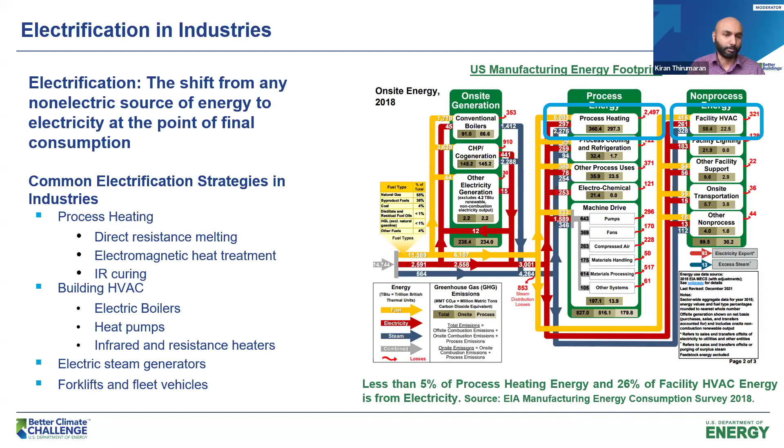So this speaks to the potential for electrification in the manufacturing sector. And similarly, even if you look at the facility HVAC, shown on the right end of your screen, we have around much less energy use, around 1,000 trillion BTUs, and a significant portion of that is still fuel fired. So both in the process heating space and in the building HVAC side, heating, ventilation, and air conditioning, there is scope for electrification within the manufacturing sector in the US. This is what we are going to be looking at. Our speakers are going to be talking a bit more about these things. Where are they finding opportunities on the HVAC side? Where are they finding opportunities on the process heating side to electrify these processes?

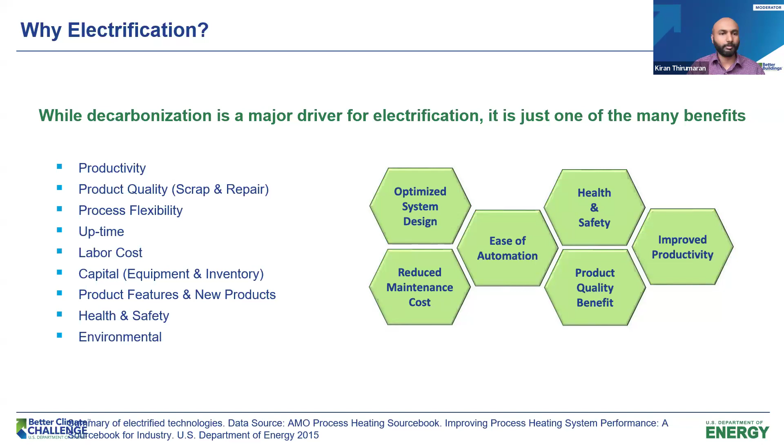Decarbonization is one of the big drivers for electrification, but it is not the only reason we would electrify our processes. There are productivity benefits that come with electrification, product quality benefits, and also benefits associated with operating cost as well. These are things we'll be hearing more about from our speakers today.

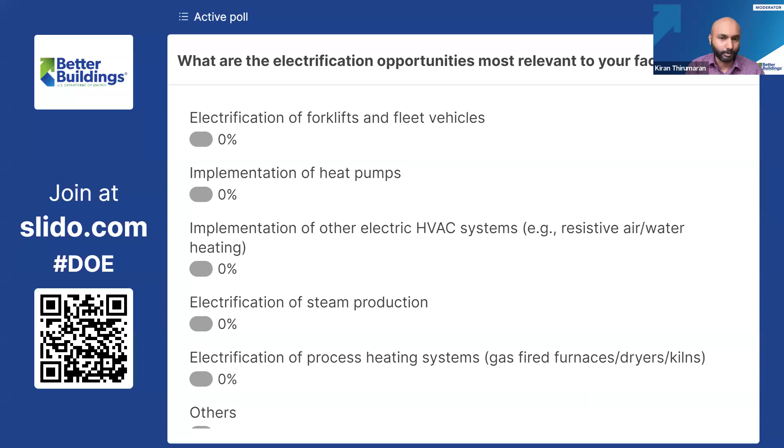So next question: what are the electrification opportunities most relevant to your facilities? And if you're not from a specific facility, what opportunities are you seeing in this space with respect to electrification?

All right, we see the options jumping around a little bit, starting to settle. Implementation of heat pumps - 40% of you are seeing a lot of opportunities there. DOE is spending a lot of resources on the heat pump side of things, developing new technologies and pushing the envelope in implementing them. We also see quite a bit of people choosing electrification of process heating systems - that's gas-fired furnaces, dryers, and also implementing other electric HVAC systems outside of heat pumps, resistive air and water heating. We do have a couple of projects our speakers will be talking about with some of those opportunities. Fantastic, thank you so much.

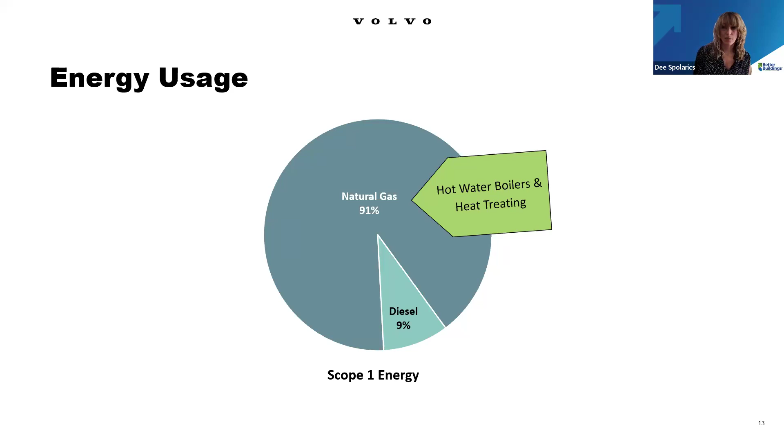Before we get into that, I wanted to touch on the fact that we have two solar systems on our site. One is a north parking solar canopy, which is a 1.32 megawatt system, and another is a ground mount system that's about 2.2 megawatts. Combined, this provides about 14% of our on-site electricity usage from renewables. But more importantly, it also reduces our peak demand by almost 50%, and that's really important for electrification, to ensure we have enough capacity on the grid.

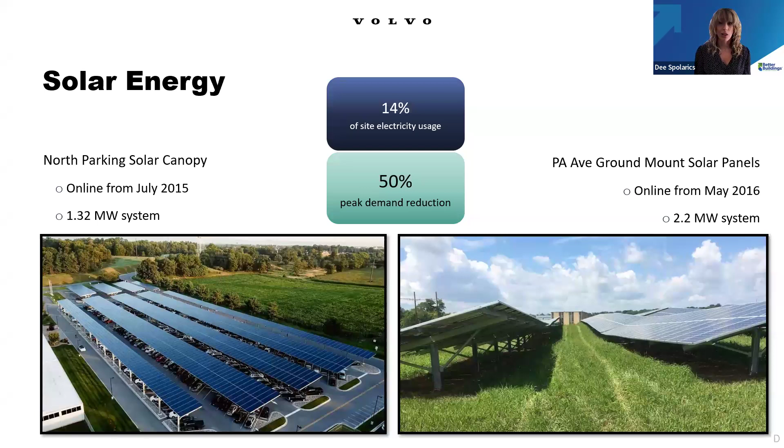We also have a number of regenerative dynamometers on our research and development side. Our facility is split between operations and GTT, Group Trucks Technology. On the technology side, we have engines running constantly for testing, but they're not actually powering anything. So as we've been retrofitting these test cells, we've been adding regenerative dynos so that they can produce electricity instead of that energy being wasted as heat. They provide almost or over 50% of the electricity required from our technology side of the campus.

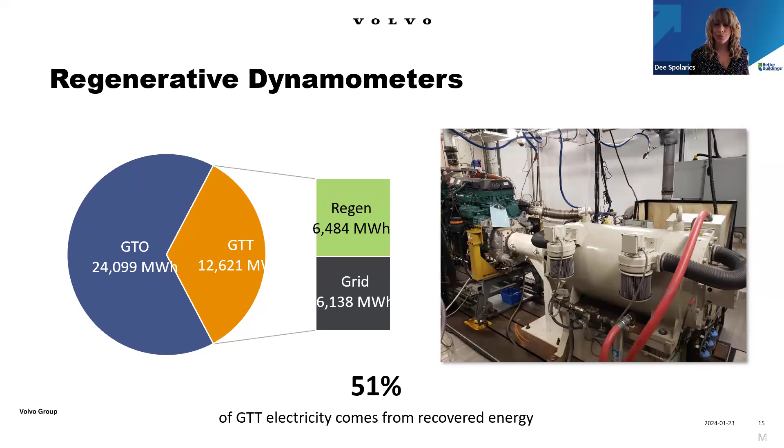As I mentioned before, 90% of our CO2 usage is coming from natural gas from our operations side, and most of that is coming from the 4 hot water boilers we have on site. These boilers heat the building primarily through a primary loop that goes to a heat exchanger for secondary loops, and there are a couple processes tied to this. As you can see, these are pretty big.

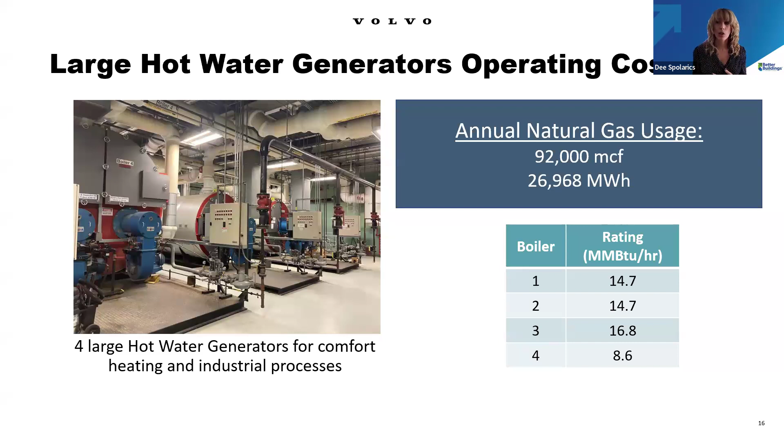So we did a case study at a different facility with a much smaller, 2.5 MMBTU boiler to see how that changed, and that allowed us to create a case study of what it would look like for our boilers here. Now the problem is these boilers aren't really at end of life yet. We still have maybe 8 to 10 years on them. So it's that balancing act of, do we do this now just to meet our goal, or do we look more at the whole life cycle of the unit?

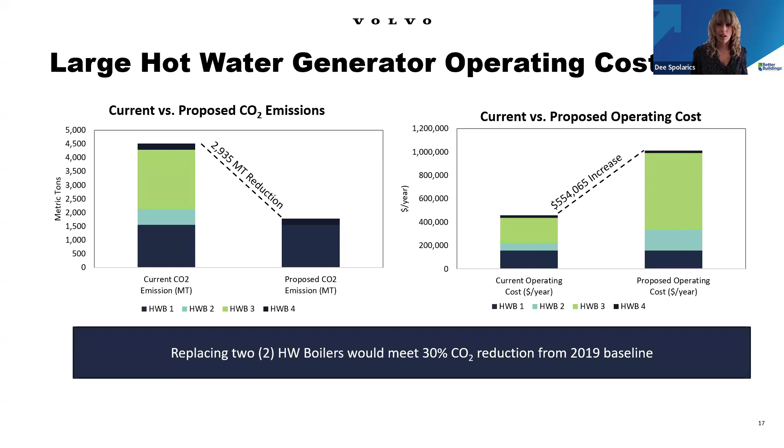So here was our initial analysis, not looking at first costs, just operating costs and how that would change. If we wanted to reduce our CO2 emissions by 30%, we could replace 2 out of 4 of those boilers. That would reduce our CO2 emissions by about 3,000 metric tons. But specifically, if we're looking at replacing these with electric boilers, that cost is going to increase quite a bit, simply because natural gas is just cheaper than electricity. As you can see, it would increase our operating costs annually by about $500,000 just to replace 2 of those boilers. So again, this is not something we have completely ruled out, but we do want to make sure the business case is there.

In addition to operating costs, it's really important to see the whole picture. Demand costs can really make or break a business case, so it's important to look at that as well. As an example, this is how it would look for our peak demand. Every electric utility is different, so you have to look at your bill and see how your demand bills are structured. For us, our current on-peak annual cost for demand is about $469,000. If we were to replace 2 of those boilers and move them to electric, we'd be looking at about $780,000. For 4 of them, $1.5 million. So this is something we've placed on hold, and we said, okay, what can we do beyond this to maybe reduce the load from the boiler, so that down the road, when they are ready to be replaced, we're only replacing 1 or 2 rather than having to replace 4 and have these very high costs.

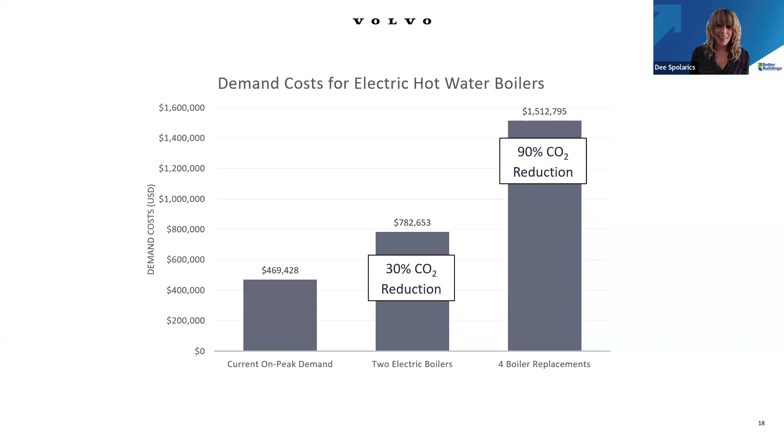So our next step was saying, what can we do to reduce that load from the boilers? Most of the consumption is coming from space heating, but we do have a couple processes on it, such as our engine oil heaters or specific washers we have. Our engine oil heaters use the natural gas boiler loop, and because the oil needs to be heated to 140 degrees Fahrenheit, that means we have to keep the boilers at 183 degrees set point all year round. If we can just remove this process, which really doesn't take that much energy from the loop, then we could reduce that set point. Reducing the set point isn't going to result in a whole lot of savings - there will definitely be some transmission losses avoided - but really the benefit here is that we can now look at other technologies that don't have to go as high as 180 degrees Fahrenheit.

I know heat pumps are a really hot topic right now, and there's a lot of new technology coming out for that. But the struggle is that high temperature that they need to get to. So I'm seeing some in the range of 140 to 160, not really 180.

Doing something like this could help us open up for different types of electrification technology. In this process right now, it's being heated kind of far away, and it's staying heated constantly. So we're taking this opportunity to look at a tankless heating system and heat right at the source, which would allow us to save energy as well, rather than just shifting to electric.

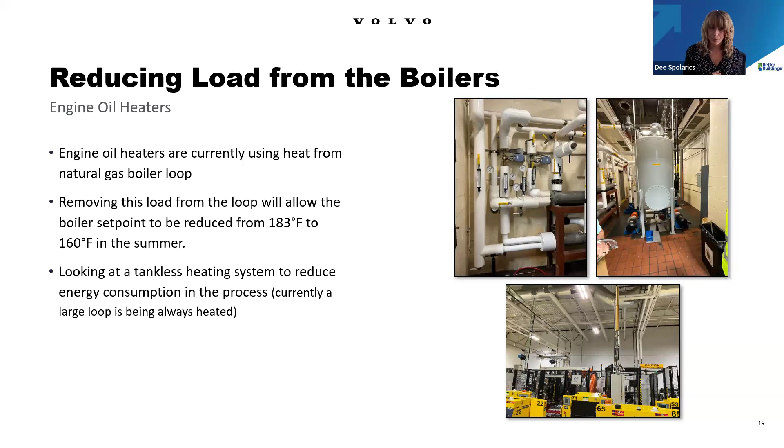Next slide. So our other big process that uses natural gas is our heat treating furnace. We have one you can see in the bottom right here that was purchased right before we made these CO2 reduction targets, so this one is completely natural gas. This is a carburizing furnace, so it also requires RX gas to create the atmosphere it needs. Going forward, we've also been looking at getting a second one of these furnaces.

So not even a CO2 reduction, but just avoidance of CO2, we need to look at some other alternative rather than a fully natural gas furnace.

So the two options we were looking at: one is all-electric, which of course would use resistance heating. We would still need to use some natural gas for the RX gas, which creates the atmosphere, but there is some opportunity to possibly use hydrogen or a different low-carbon fuel in the future for that.

Another option we looked into is a possible hybrid. The reason why is because these furnaces have to get up to 1700 degrees Fahrenheit, but once they're up there, they usually stay there. We're constantly producing, so it doesn't make sense to cool it down and bring it back up - it ends up using way more energy that way.

So the big concern is, how are those demand costs going to look if we need to ramp it up to temperature quickly, all with electricity? That's what that cost comparison is down there. It's still a lot less than the boilers, but it's a hefty chunk of change.

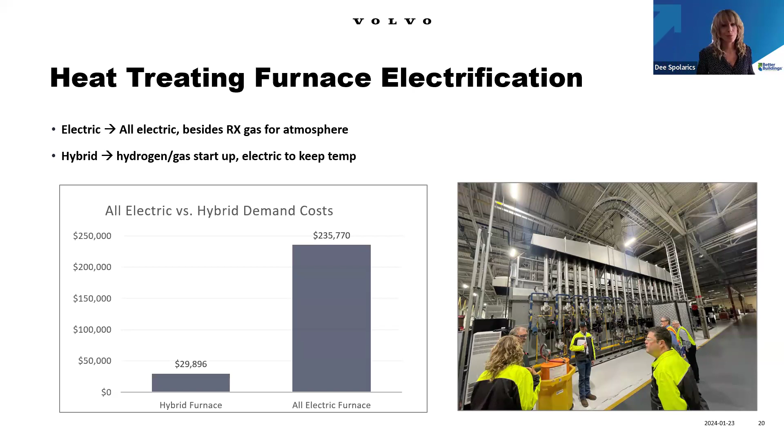Next slide. So when it comes to heat treating, there are multiple ways you can heat treat. The one before was a carburizing furnace, but we also have induction hardening on site for our crankshafts. Induction hardening is all electric, and it's really great technology. It's definitely something, before considering which one to do, to first look at induction hardening, because if you can make it work, it's much better in the long run.

The benefit is that electricity is being put exactly where the metal needs to be treated, so you don't have to heat all the air that surrounds the parts themselves. That really increases the energy efficiency. Also, it will improve precision and process control, so you can do even higher production rates.

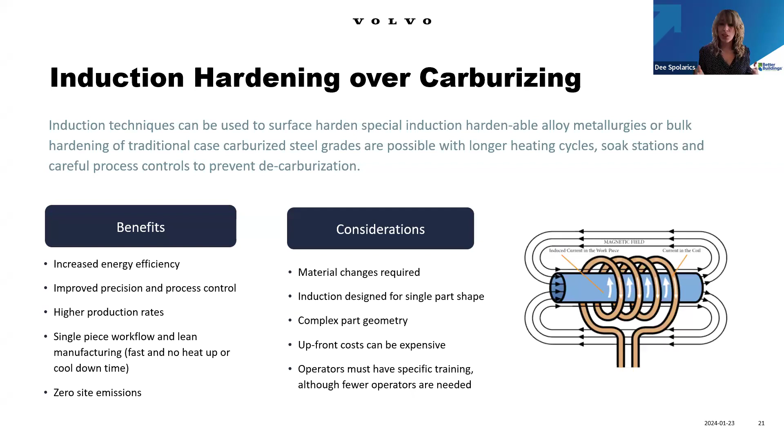There are some cons to this and considerations. If you have a process that needs multiple different parts, it really is only meant for one type of part. For example, in our heat treat furnace, we did look at induction hardening, but it just wasn't cost effective because we would need so many different parts and processes to go through. So it's something to look at, because it can really make a big difference.

Next slide. All right, so a couple final thoughts here: remember that every application is different, every facility is going to be different. But the first step, if you haven't yet, is to really understand your facility's heat loads and when they occur, and see how you can quantify and maybe work together to reduce things here to be able to reduce it there.

For electrification, electrical infrastructure is really important to understand early on, because there are going to be constraints. You may not have a lot of demand even available, so you've got to work with your utility to understand that. They might even, if you're adding a lot of stuff to the grid, want to do some load studies. So that would be a really good time to make sure those are in the pipeline, so you can be ready when you want to do those electrification projects.

Work with your utility, because there are so many rebates and incentives out there. Here in Maryland, there's a really great program which we pay into every month as part of our electric bill, and then we can get rebates out of that. If you're not taking advantage of that, I really encourage you to do so, because otherwise you might be leaving a lot of money on the table to help these business cases.

Also, consider, as I mentioned, not only operating costs but also demand costs. It's really important to have the full picture along with your first costs.

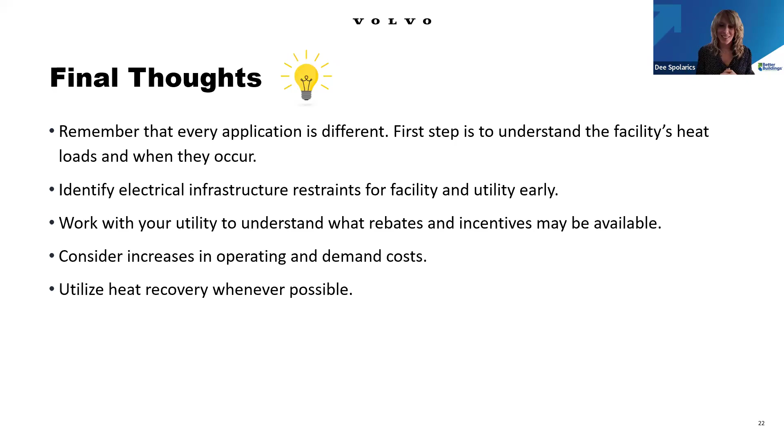And that's all I have for you today. Thank you so much.

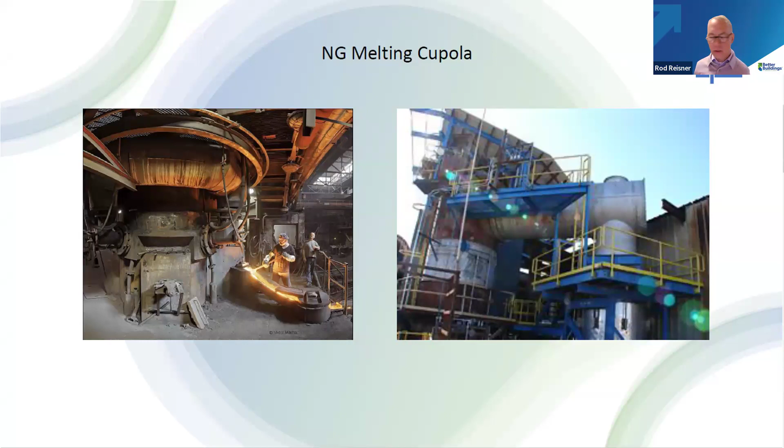The process uses scrap metal. Our ductile iron products are over 98% recycled content, so we start with a very high bar from our recycling content. We charge the cupola with coke, raw material, and other ingredients that we call our secret recipe, in order to make ductile iron. Next slide.

We know the following: we have two projects currently in Anniston. One is a new product line where we are installing an electric melt oven. In doing so, we decided to evaluate changing the natural gas cupola as well.

Making the decision in a boardroom is pretty simple, but in delivery it's very complicated. It's a bit like remodeling a house rather than starting from scratch. So what does it mean to go from a cupola to induction melting?

We had several opportunities here, and I'll explain some of our challenges later. But one was, of course, gathering some data—facts that helped push our decision to convert.

In a particular month in 2022, Tyler Union, again in Anniston, Alabama, melted over 4,000 tons of material with afterburner usage of approximately 2,400 MMBTUs. The proposed project would replace the existing cupola furnace with electric induction furnaces, significantly reducing GHG emissions by eliminating the use of coke and natural gas, at a cost of over $18 million a year.

As an example, for Scope 1 emissions in 2022, we reported from the current cupola operation over 27,000 metric tons of greenhouse gases, with coke contributing around 22,000 and natural gas contributing nearly 5,000 metric tons. Since electric induction furnaces do not use coke or afterburners, there will be a significant reduction in greenhouse gas emissions by nearly 91%. So that's a pretty easy case to make.

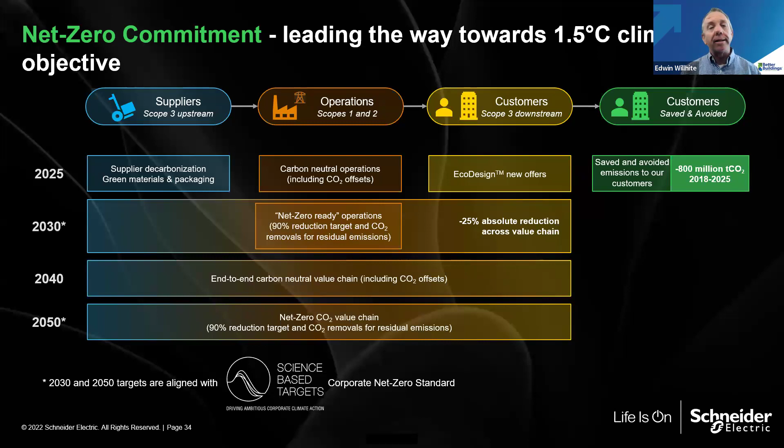Net zero ready means that we will buy offsets to take care of electricity, and we will be out of the gas business in all of our operations by the year 2030. Quite a big goal, one that took a long time to communicate and get buy-in, and we're still getting the ball rolling. It's in all of our sites in North America, over 50 or 60 sites, and as we roll that forward, it's a big elephant. Today we're going to talk about just one bite of that elephant.

We've got a long history with our energy program, which started in the year 2005. We've worked for a year-over-year energy reduction goal every year since then. We've had a great partner in the Better Buildings program with the Department of Energy, and we appreciate that. We're now on our third iteration of goals pledged for Better Plants, and we're looking forward to another 20% of energy efficiency in the next few years.

What are we doing and how are we doing that? Our energy efficiency program - the first thing we do, and what we're most comfortable with, is energy efficiency, and we're continuing to invest. The easiest and best way to reduce carbon is not to produce it, to not need it. So we're investing heavily in continuing our energy efficiency program. Electrification means we're transitioning away from the use of fossil fuels, converting and electrifying those processes. And last, we are sourcing our electricity from renewables, and I think we have further goals down the road to take that even further.

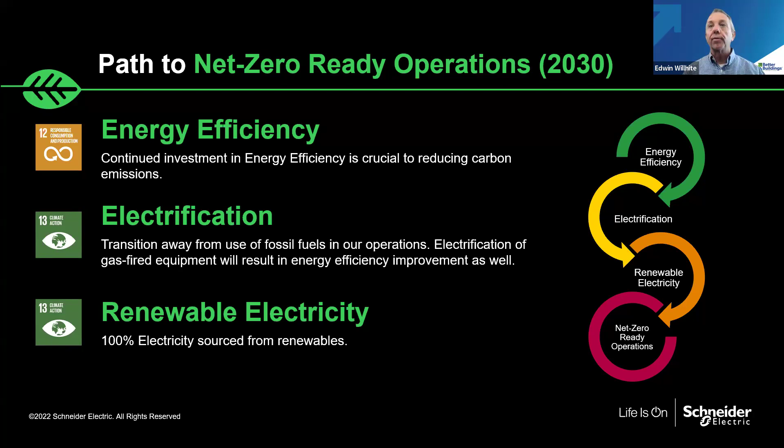So what does that mean? Inside our facilities, it means we've got to eliminate all of our natural gas that operates the facility - HVAC, boilers, hot water heaters, stovetops in our cafeterias, ovens - everything has to convert to use electricity. We have an electrification goal for our processes, which would include paint lines, preheat ovens, cure ovens, and our plating processes, and we have the challenge to convert those from natural gas to electricity as well. It's kind of funny - up until just a couple of years ago, we were still installing gas. When our company made the commitment, it was like turning a switch, and then we were all in for electrification.

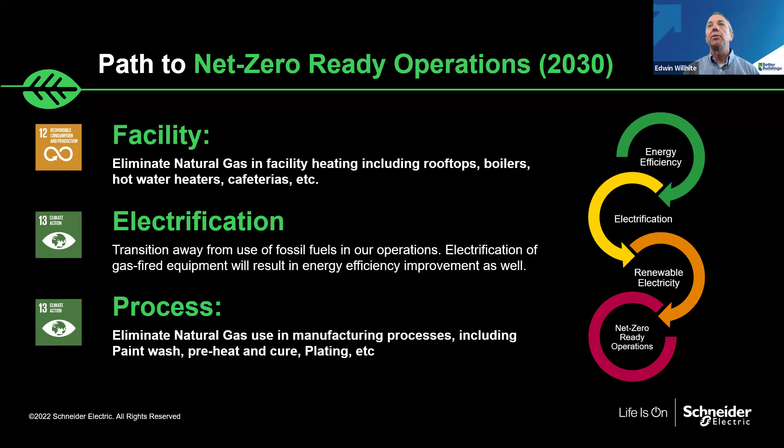So the step we're doing today, in our Columbia, South Carolina site - we had an old boiler, and part of it operated a cleaning process for our bus bar, large pieces of copper used to conduct electricity in our switchboards. We got rid of hot water for comfort heating of the building 5 or 6 years ago, but we didn't have a clean way to get rid of this process. You can see from the FLIR camera, it's a very inefficient process. We were leaking heat into the building, with lots of humidity in Columbia, South Carolina, making a tough situation worse, plus lots of maintenance on an antiquated boiler. So we decided to eliminate that process and replace it with a very compact, very efficient electric water heating and cleaning process from JenFab. The cost of this equipment is somewhere between $300,000 and $500,000, depending on how you count taking the equipment out and cleaning up the area.

We're expecting it to use less than half the energy of the old process. We get rid of a boiler that was terribly oversized. We put all that equipment at point of use. We free up floor space so that we can hopefully have more manufacturing to shorten lead times of electrical equipment, which ought to hit a note with everybody. For us, it's a win. Again, it's one bite off a big elephant.

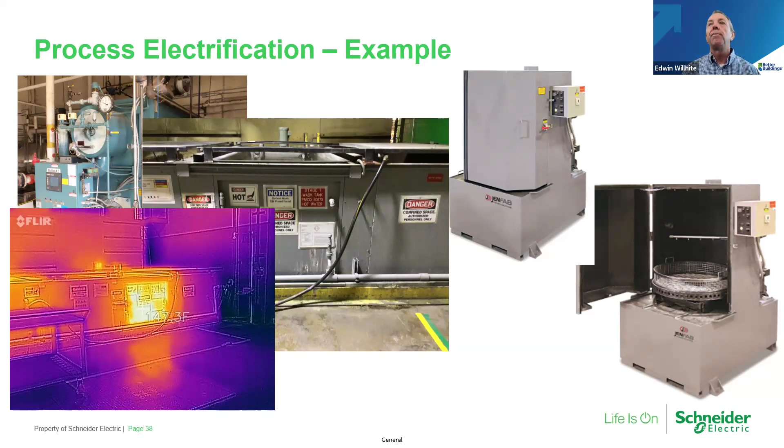So what's next? Next year in Columbia, we'll be replacing 5 and 6 year old rooftop units with heat pumps. This is the next step of that process - the natural gas oven where those bus bars are plated and then the plating is cured. We'll be working on the technology and process to change that to electricity as well.

This is going on, and at Schneider we have a lot of relatively small facilities that together use a lot of energy, so we do a lot of benchmarking with each other. We find that this process works in Columbia, and then we replicate it at several other facilities that use a similar process. So again, one step towards our goal of zero carbon.

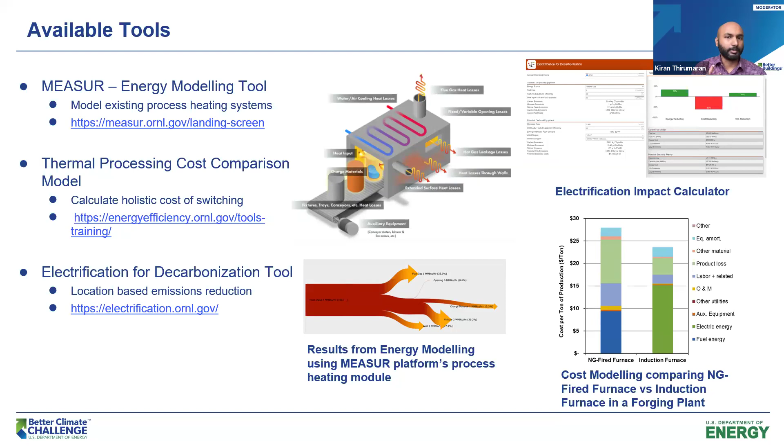So those are some of the tools that we already have. Next slide. But through the Better Climate Challenge program, we continue to develop new tools. One of the big things we're working on is the Electrification Assessment Framework, a product of a collaborative working group discussion we've had with our partners last year. We are putting together this framework on how to go about doing a facility-level electrification assessment.

Going through all the different topics our speakers spoke about, starting with evaluating your electrification infrastructure, identifying projects, comparing them, and eventually implementing it. The report will go through the steps you could take to implement it.

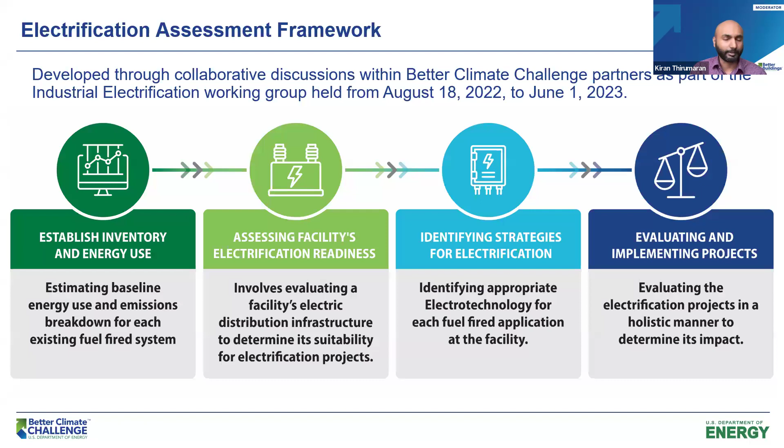We are also developing complementary, supplementary tools that go along with the framework, tools for evaluating specific technologies like heat pumps and forklifts, and the cost savings and emissions reductions that come with it. Those tools continue to be developed and will be published in the coming months.

Outside of these tools and resources developed by the Better Plants and Better Buildings program, the broader DOE also has a lot of activities going on in the electrification space, from technology development and fundamental research to piloting projects and getting them to a point where they could be commercialized. We don't have time to talk about everything going on in the electrification space within DOE, but I wanted to highlight a couple of things.

A lot of this you could follow up on with more information available online. The IEDO office within DOE has been putting a lot of research funding in over the last couple of years and continues to do so. One funding announcement that came out last year is to develop technologies for decarbonizing industrial heat specifically, with interest areas including industrial heat pumps, electrification of industrial heat, and innovative low and no heat processes. DOE continues to put in quite a bit of effort to develop new technologies in this space.

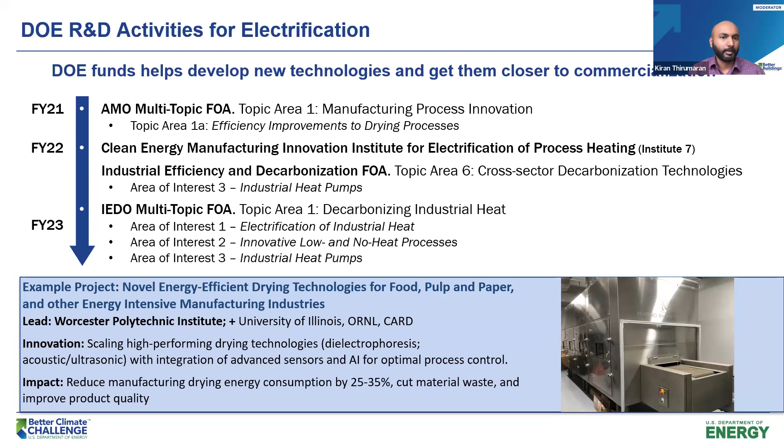DOE has also set up the EPIXC Institute, Electrified Processes for Industry without Carbon Institute. This is going to be led by Arizona State University, and they are putting together the pieces to kickstart this institute, which will be a collaborative effort where manufacturers and other stakeholders will be able to take part in its activities, with the holistic goal of developing and implementing electrification projects and technologies and taking them to the next level.

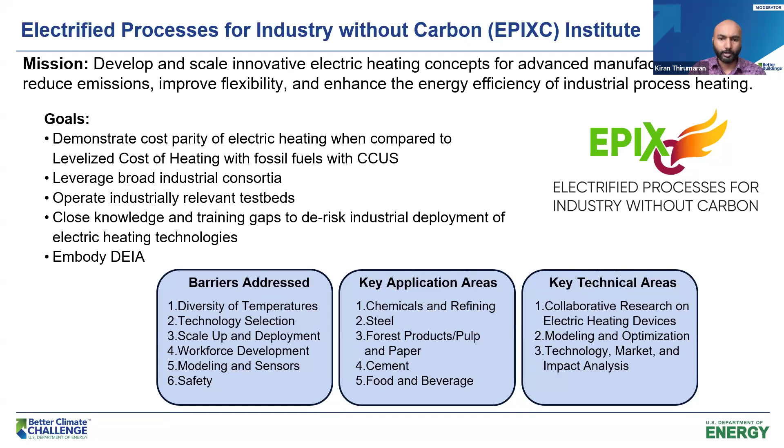On a similar note, we have the Industrial Heat Shot, a department-wide effort to bring about decarbonization of industrial heat. This includes not just electrification technologies but also other technologies like hydrogen and other fuels. Thermal processes are a big consideration within this DOE-wide effort to decarbonize industrial heating processes.